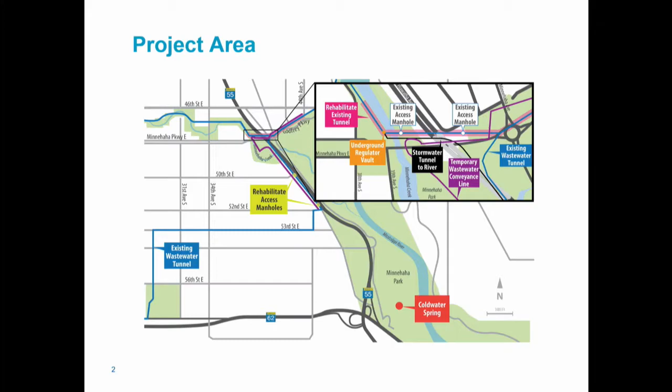Project scope includes tunnel rehabilitation. We're going to rehabilitate the existing tunnel, and to do that we need to provide a safe working place and ventilation of the working area, which might require the installation of 2 ventilation shafts.

We're going to rehabilitate and convert the regulator R4 structure to an emergency relief structure, and also rehabilitate 2 drop shafts, one at 50th and one at 52nd Street, due to hydrogen sulfide corrosion damage. Also included in the work is cleaning of about 2,000 feet of the 1MN340 interceptor.

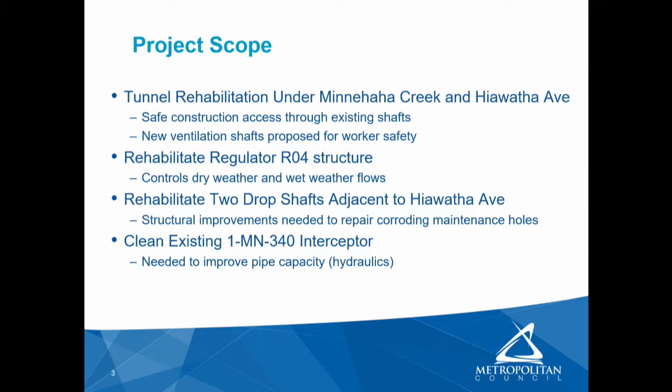This map shows the properties impacted by the proposed work. There are 9 parcels owned by the Minneapolis Park Board. We'll need temporary and permanent easements. The bulk of this is for temporary conveyance and for improvements to the regulator or emergency overflow structure.

We also require one easement from a private property, Cap's Bar. In the item we noted we had trouble reaching him, but I found out today that we have finally made contact and met, and it was productive.

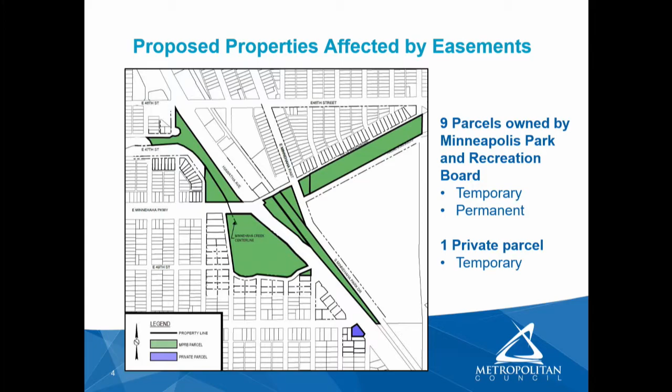This is the proposed construction schedule. Basically, the procurement phase will start in February, last to probably around July, and then construction thereafter, terminating in May of 2022.

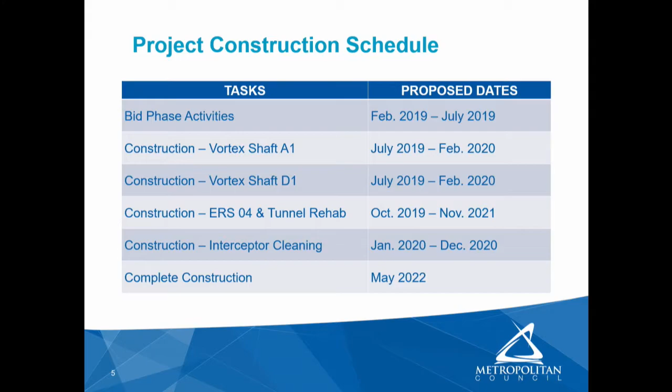Lastly, I'll restate the proposed action: that the council adopt Resolution 27, authorizing the acquisition and use of condemnation for permanent and temporary easement acquisition, all for the emergency relief structure R4 and the 1MN344 tunnel rehabilitation, project number 807629.

Are there any questions for Scott? You said the condemnation is of permanent and temporary easements—how much of it is temporary? Madam Chair, I don't have the precise figures, but most of it's temporary, for the temporary conveyance piping and pumps. Only one private property is involved. Madam Chair, that's correct.

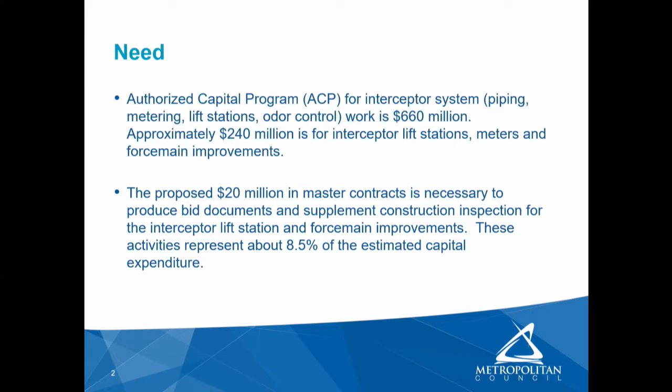Basically, the contract scope is full service engineering services. That means all disciplines are addressed, or the firms are capable of providing those services, and it will be utilized in preparation of bid documents for interceptor projects involving lift stations, meters, and force mains.

And a portion of the value of the contract has been set aside for construction services, and this involves shop drawing review. For any equipment that's going to be installed, you get shop drawings, it needs to be reviewed. Requests for information - often contractors have questions about the construction documents, and the designer has to address those. And construction inspection.

We received 10 proposals. The committee reviewed all 10. Each committee member reviewed it individually. Once they were reviewed, they caucused, met maybe 2 or 3 times, to determine the highest ranked proposals.

They recommended awards and contract values as shown here to Brown and Caldwell, Bolton and Menk, Stantec Consultants, TKDA, and SEH, each for $4 million. These firms were the highest ranked and provided the best directly related experience and expertise.

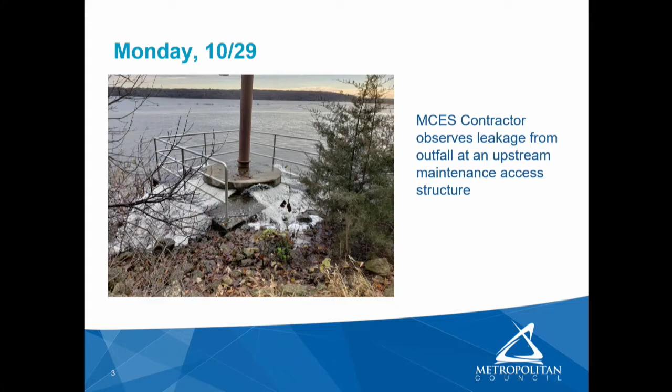On Monday, October 29th, our contractor, LS Marine, was out completing a river survey. They were preparing to start work to replace bedding under that section of the outfall where the rock training structure would be placed over it. So they were out doing survey work, and they observed leakage at an upstream maintenance access structure on the bank. And they contacted our construction field office and let them know.

This is a close-up of the kink in the pipe. Can you see that? 48 inches. Doesn't look like it, but it's right here. And also, this is a close-up of the end section that was torn. This is the end of that kinked segment. This is not where it broke off. This is the 130 feet that was missing. That's where it had torn and come loose.

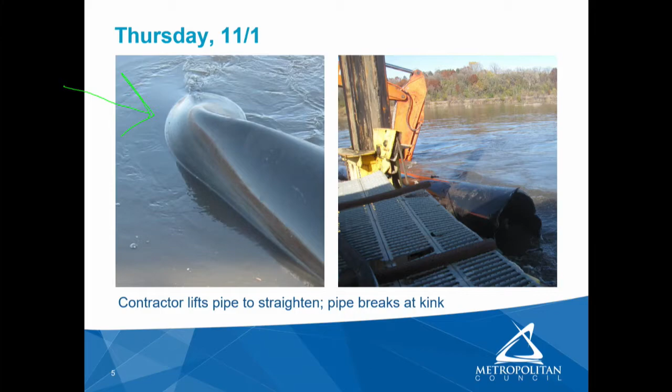Bummer. I did it. I left that. Sorry, Susan. I think I can still get it.

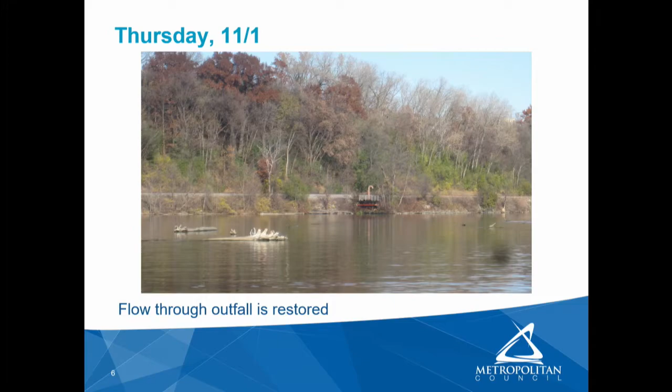Leakage from the upstream maintenance access structure stopped as soon as the kink had broken loose, and the flow through the outfall has been restored. Note that the plant treatment capacity and the plant performance were never compromised. We declared an emergency Thursday at the end of the day because the outfall is damaged. The end section is unrestrained. It had concrete anchors every 20 feet. Those at the end are missing. The discharge point is not in its permitted location. You know, this ensures adequate mixing so that we meet our effluent permit limits.

Immediate repair is necessary because the outfall pipe is vulnerable to further damage. It is in a high barge traffic corridor, and the area is currently under construction by the Corps of Engineers. As I mentioned, they want to get in and install that second rock training structure. Before we can repair anything, we need to confirm the condition of the remaining pipe. This week, we plan to have the inside inspected, and we also plan to do another river survey that would give us an idea of the location of the existing pipe, give us more information, and then we would be able to design a permanent fix.

The work supports the Thrive outcome because it's efficient, effective use of resources for preservation of infrastructure, the Thrive outcome of stewardship. The emergency declaration in the amount of $6 million is based on the estimated total replacement cost. As I mentioned, we don't know the condition of the pipe, and if we can reuse it, we will. But at this time, we don't know what's been torn loose. We would like to verify the condition of that pipe through the total length that's in the river.

I'd piggyback on that question. When I look at the red line where the actual channel is, it seems to come awfully close to your outfall. Was that thought about when they positioned the outfall? Madam Chair, I did review the facility plan for cost estimates and the value of that pipe, and there was some fancy hydraulic modeling of barge velocities and forces on the end of the pipe to make sure that it could withstand that, not a hit. If you notice, the new outfall, the brown line, is shorter than the abandoned pipe, so it was pulled out of the barge traffic somewhat.

I can also state that, on here it says that the Corps annually dredges this section of the bend for the barge traffic. And there's an area that's buoyed off. That's also a note on here. And we are outside of the buoyed path of the barges. So when they put this new rock wall or dam in, will that further protect the outfall?

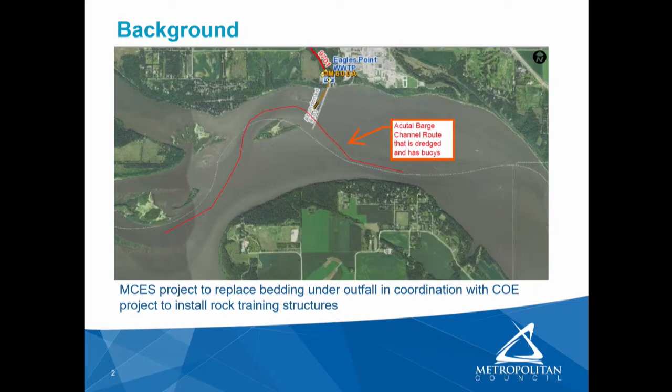Madam Chair, possibly. We have some engineers that think it could protect the outfall, but I think the outfall outlet needs to be on the other side of the rock training structure so that it can get the channel mixing of the velocities. And once it's outside of the rock training structure, it's unprotected. I showed on the slide that this would not necessarily protect the outlet against barges. Those are big boats.

But there's a design to the outlet. This outlet came out of the bank and turned up, designed to maximize mixing, and you'll see the concrete collars here that help with the restraint, and on the end is the armoring riprap to keep the river muck away and keep that thing from moving around. So there is a design, and I think the next one would probably be similar. We might beef up the end, but it needs to get out in the mixing flow.

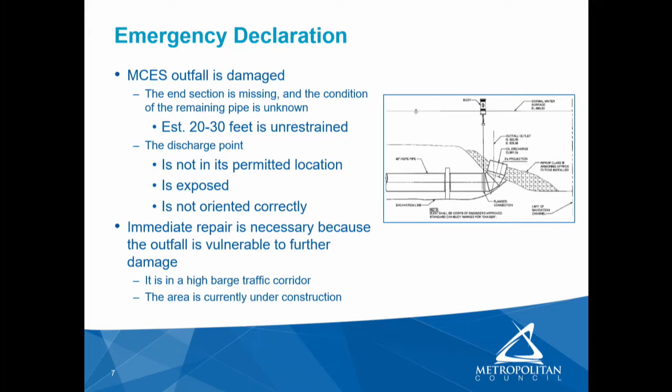Sounds good. So the proposed action is that we ratify the emergency declaration attached to the business item for repair of the outfall pipe from the Eagles Point wastewater treatment plant in the amount of $6 million. Do I have a motion? Or are there other comments?

I'll move the action. Sure. We have a motion and a second. All those in favor, please say aye. Aye. Opposed? The motion passes. Thanks, Renee. We put you through the ringer there.

The next item, 2018-312, is a request for a public hearing on the acquisition of the Rogers Wastewater Treatment Plant. And Janine's going to walk us through this. Madam Chair, members of the council, tonight we're asking you to authorize a public hearing for the Rogers Wastewater Treatment Plant acquisition. Some background:

So the Rogers wastewater treatment plant acquisition was identified in the Thrive 2040 Water Resources Policy Plan and was also identified in the City of Rogers comprehensive plan. So again, the background, the acquisition of the Rogers wastewater treatment plant was contemplated in their 2030 comprehensive plan, and this amendment was approved by the council in 2016.

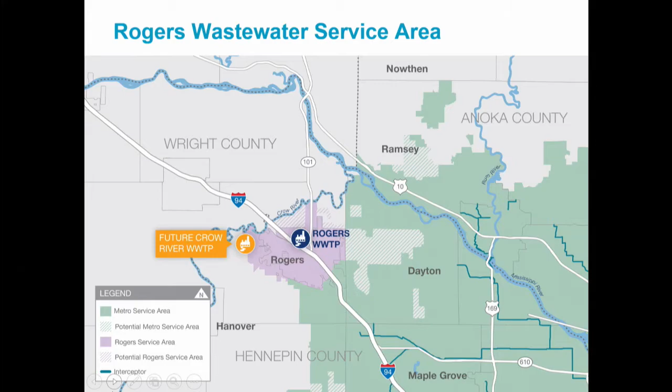So the Thrive outcomes is stewardship. The wastewater treatment in the region protects water resources and public health. Prosperity, the regional wastewater system exists and does foster the economic growth of the region. And then the principles of collaboration are clearly identified. Council staff has been working with the City of Rogers on this possible acquisition since 2004. It's been a long, long time.

The recession had a lot to do with kind of a slowdown of their desire to have us acquire their plant. But now with growth continuing and the Elm Creek Interceptor having limited capacity to serve the northwest Hennepin County area, it has now become apparent that it's important for us to proceed with the acquisition. Whoops, excuse me. So the key dates for the Rogers wastewater treatment plant acquisition include authorization of a public hearing. If approved tonight, it would go on to the full council the 28th of November.

We would hold the public hearing mid to late January of 2019. And after that public hearing and consideration of the comments, we would ask the council to consider authorization of an acquisition and wastewater service agreement with the City of Rogers. We anticipate that would be available February of 2019, followed up by the Metropolitan Council shortly thereafter.

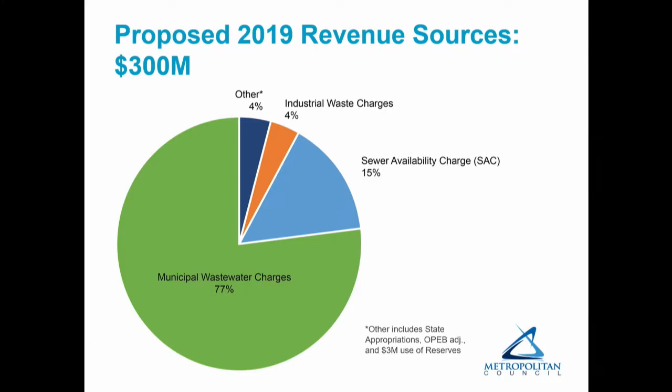Before Deborah gets to the review, and I think I'm going to skip over this slide, before Deborah gets to the review of the actual proposal, she will walk through the steps that MCES is taking to meet the goals for operating the regional wastewater system in a sustainable way. And then she will transition to a technical review of the STIR proposal. And then I will wrap up our presentation with some concluding remarks.

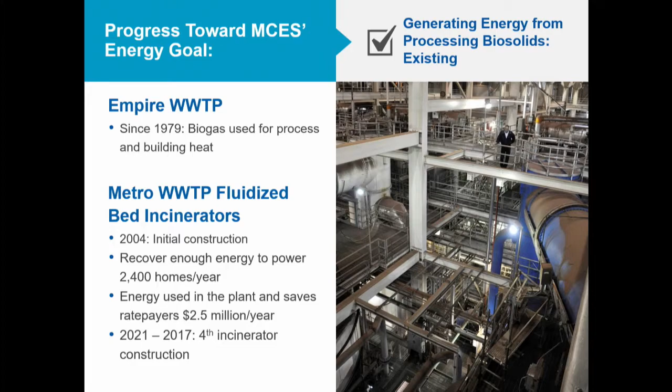In the future, we plan to install at the Empire plant a biogas combined heat and power project, and this will use biogas from solids processing to generate about 30% of Empire's heat and power needs, saving about $350,000 per year. We'll also upgrade the boilers there to high efficiency boilers.

Another area that Janine ran through in the beginning was recovering heat from plant effluent. Since 2004, at the Eagles Point wastewater treatment plant, we have been recovering heat from our effluent and using it to heat the administration building. It was kind of a pilot test at that time. We wanted to learn more about heat recovery, and what we found is that the equipment is actually relatively issue-free when used on plant effluent, so there's little solids to clog up the system. And in 2019, we'll be installing some monitoring equipment so we can better determine the energy savings.

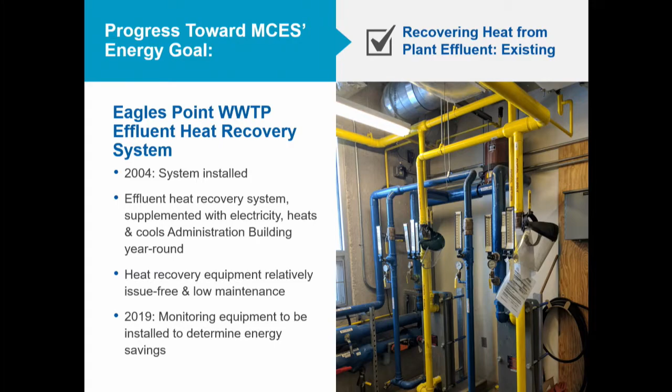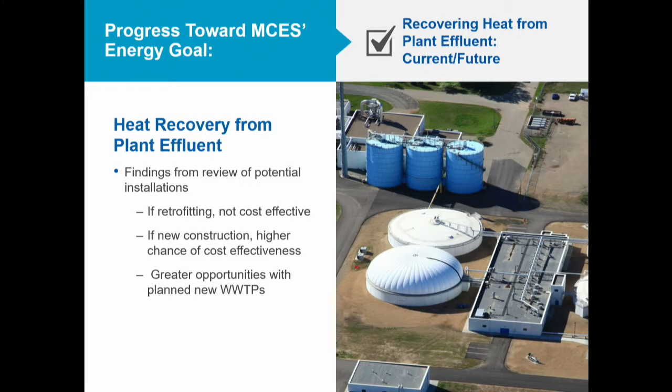We recover heat from plant effluent, as I mentioned, at Eagles Point. But most recently we've done a study of where else we might do that. And what that study found is that if we're retrofitting our heat equipment as part of what would need to be done, it's not really cost effective. But if it's new equipment, we have a higher chance of it being cost effective. And so we would be looking at those new treatment plants as opportunities to recover heat from the effluent.

Another area is solar power generation. We've been making a lot of progress here. In 2017, at Blue Lake, we completed a behind-the-meter solar installation as well as a council-sited community solar garden. And we completed council-sited community solar gardens at Empire and the Seneca Ash landfill as well. We should note that we have also been subscribing to community solar gardens that are not on our site. And we project that 80% of our projected energy savings from solar will come from subscriptions.

We've also been pursuing additional technologies as capabilities and economics are proven. In our aeration basin, as mentioned at the beginning, that's an area of high energy use. We've completed dissolved oxygen control projects, enhanced diffuser cleaning, high header pressure reduction. We basically are implementing what we identify as proven technology, cost effective to install, and moving along with that.

We've also, at Metro Plant, installed some high efficiency lighting improvements, and you can tell between the second and third slides there what a difference this makes in the tunnels at the Metro Plant once we've upgraded that lighting.

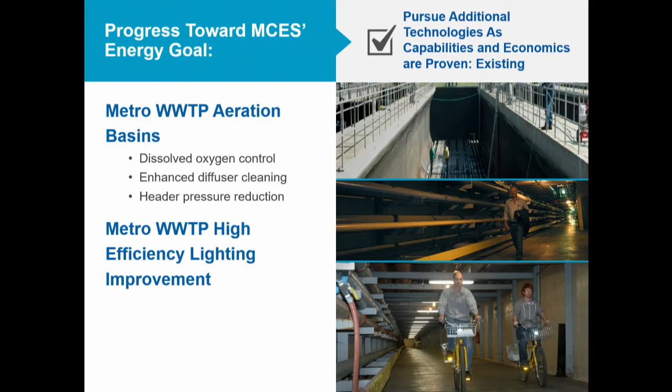We continue to look at ways to improve our energy reduction and meet our goals. And one of these, we believe, is the Industrial Pretreatment Incentive Program, which we think will actually change the characteristics of our treatment processes themselves. For example, at the Empire treatment plant, we recently completed an agreement with Kemp's to receive their high-strength waste from their dairy processing directly into our digesters.

And we will be able to produce more biogas that way, which we've been mentioning we use for process and building heating. And we believe we will increase that biogas production by 23%. That would enable us to decrease our energy use for heating by the equivalent of about 172 cars per year. So we'll also be able to take some traffic off the road. So that's not equipment per se, but a different way of running our system.

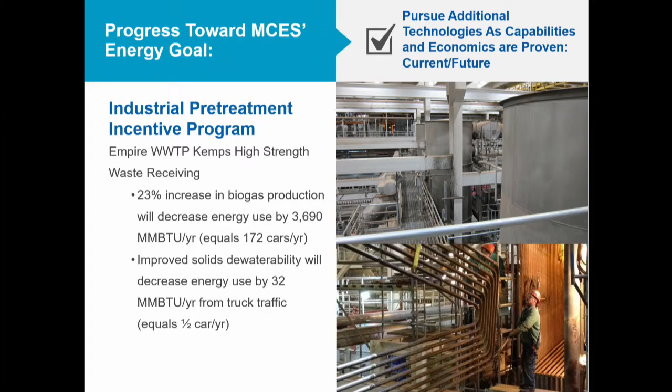But there's kind of the so what. We've done these projects. What has the impact been? We've been tracking our greenhouse gas emission reduction, and this graph shows from 2005 through 2017 how the progress has been going. A number of different colored bands there. The green is electricity, the light blue is metro sludge incineration, the orange is effluent discharge, the dark blue is natural gas, the light orange is Seneca sludge incineration, and the gray is nitrification, denitrification. So these are all areas that we track in terms of greenhouse gas emissions and reductions.

The other items shown on this graph are the 2030 state policy goal for energy reduction, which was about that 30% reduction, which we have already met. And then the 2050 reduction goal is shown in the darker band there. And we're well on our way to meeting that goal as well.

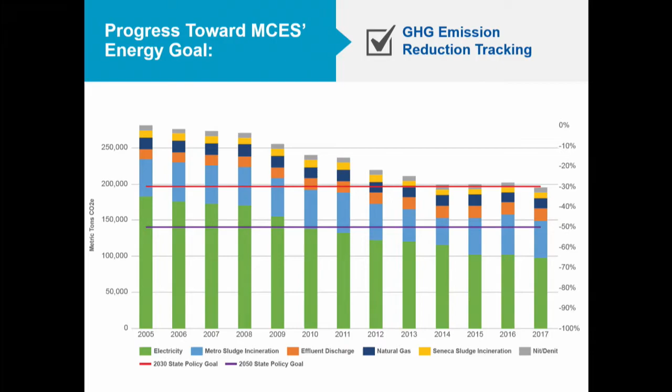I do want to mention that we look at ourselves in comparison with other sources of greenhouse gas emissions. And this graph represents some of that information. We are kind of in that orange band in the middle. These are areas that the state uses to track greenhouse gas emissions and sources. The green is the electrical production. The light blue is transportation. Like I said, the orange is waste, which includes wastewater treatment plants, but also landfills.

The dark blue is agriculture, then industrial in yellow and residential in gray, and then commercial at the top. So across the state, that's the bar on the left. The orange there in the middle is all the wastewater treatment plants and landfills. Kind of a small component there, and the region is shown on the right, and these are 2010 numbers. And so we're a small contributor there, but that doesn't exclude us from working on greenhouse gas emissions. It just puts it in context.

So, Deborah, I just want to make sure I understand. That's that narrow orange line in both graphs. That's the greenhouse gas from wastewater treatment plants and landfills? Right, landfills. So it's really quite small in comparison. Okay, interesting. I would have thought it would be worse. Mhm.

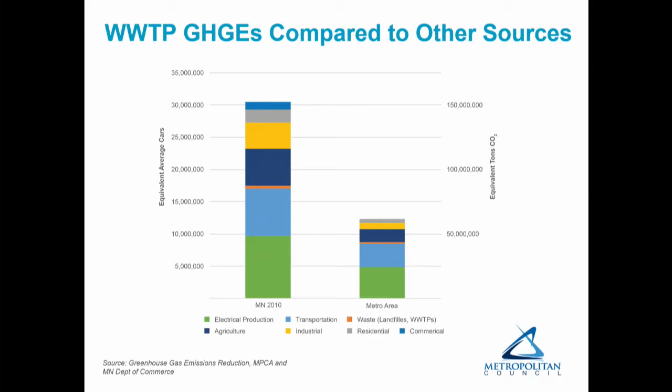So that is the portion of the presentation that talks about our progress towards our energy goals. I want to shift to the Towerside Sewage Thermal Energy Recovery proposed project.

We've got a little timeline here. About 3 years ago we received the inquiry from Ever-Green Energy about their potential STER application on an MCES interceptor. From 2015 to about 2017, we continued discussions with Ever-Green Energy about the feasibility of that application. In December of 2017, Janine and Larry Rogacki made a presentation to the Environment Committee about some of the findings from those conversations, and there was a decision to continue exploring the feasibility.

In June through August, we did a technical review of project information that Ever-Green Energy provided—what they call their project model—and had an opportunity to look at that and have conversations with them about it. In October, we met with Ever-Green Energy, presented our final comments about that technical review, and now we're reporting to the Environment Committee.

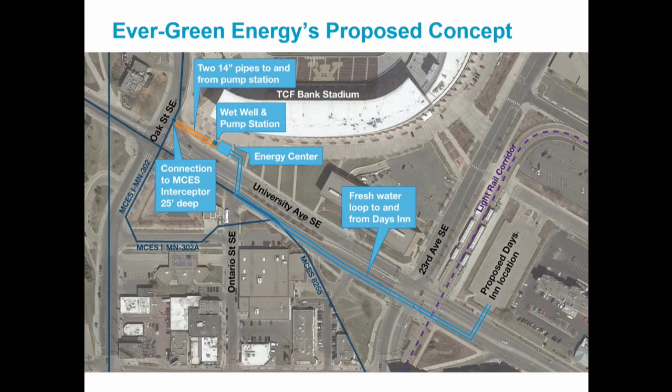This schematic just shows that loop. It's a little difficult to tell sometimes from the aerial what's going on, but the orange lines show the wastewater coming and going to that energy center through the lift station, and then that closed water loop coming and going from the site.

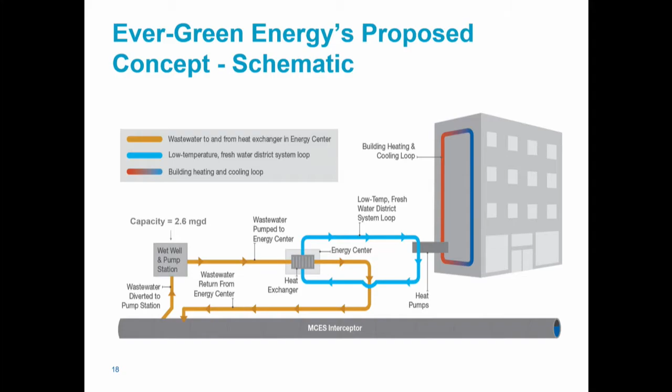There were a number of issues we looked at in our technical review. One was regulatory compliance. We met with the MPCA about how this sort of installation would be regulated. It's a new application for them, but they said a permit would be required, and that MCES must retain control and responsibility for the wastewater in the interceptor system at all times—that responsibility couldn't be transferred. We asked, can we do a handoff? The answer was no, it needs to be within our control the whole time. We concluded that MCES must retain ownership and operation of STER's wastewater-related facilities.

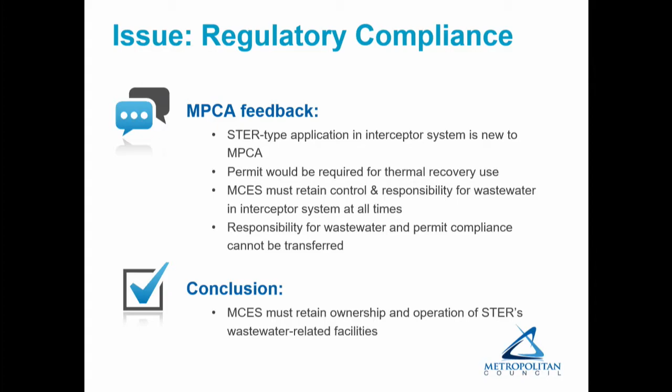Then we took a look at what a 2.6 million gallon a day lift station is like in our system, trying to find one that would be comparable. There is a lift station in Lakeville of similar capacity, 2.5 MGD. It also has a number of depth and piping similarities, so we felt this was at least a good comparison to start with.

This is a profile of the construction drawings, and the reason to show this is just the scale of the depth of the facility, which we estimate would need to be about 40 feet deep. That little blue figure on the left is there for scale, representing a person standing there in the wet well—I don't know why they would do that, but that's how deep it would be.

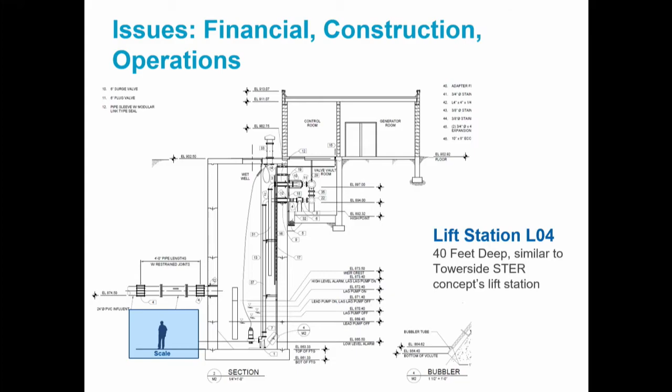We don't anticipate we would be able to do construction that way, that we would need sheeting and shoring and more expensive construction. You would need sheeting and shoring. Okay, got it, thank you.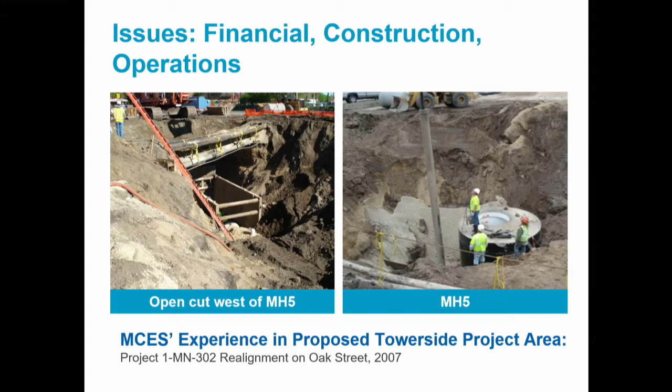So as we were considering all this, we looked at Ever-Green Energy's construction cost estimate, which was approximately $1 million, as we saw reviewed in their model and talked to them about it. Our construction estimate was about $7 to $13 million. So we really saw a difference there.

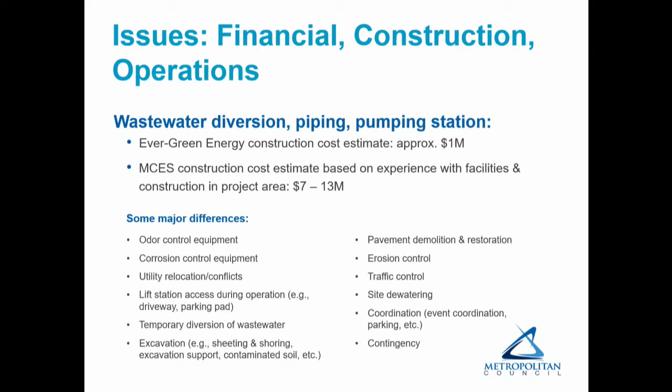Our assessment is some of the major differences between our estimate and theirs are some of the items listed here. Won't go through all of them. Things like utility conflicts, odor control equipment, temporary diversion of wastewater, site dewatering, traffic control. So we do think those are some sizable costs.

Another issue we took time to look into was performance information. We did find a lack of proven successful STER performance on untreated wastewater. We identified, and were referred by Ever-Green Energy to, two facilities where STER facilities were either installed or pilot tested. One of those is in Vancouver, British Columbia, in the southeast False Creek neighborhood, where a STER type installation is installed, again on untreated wastewater.

These are some of the items we think were associated with that installation. The drivers were really a commitment by the local city to reduce greenhouse gas emissions. What we found, this is information from a number of phone calls we made to the wastewater utility and the city, and also from reports they made available, is that their current rate for energy from the STER facility is about 23% higher compared with natural gas systems.

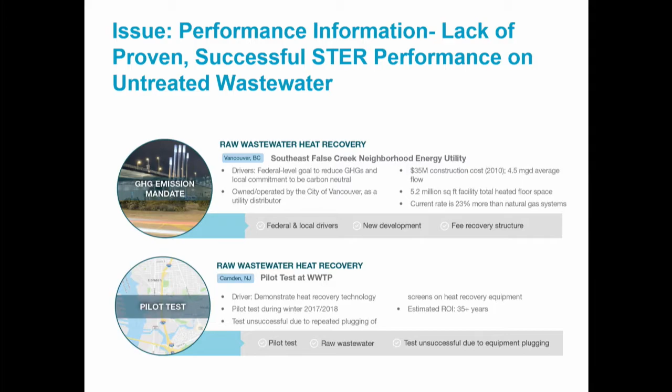We looked at if we scaled up, if we had these STER type facilities, more than one in our wastewater collection system, what impact would it potentially have. That isn't what Ever-Green Energy has proposed. They proposed one, but we need to look at, if we do this one, people are interested in doing more, what impact might that have.

So we looked at if our wastewater temperature to the Metro plant was reduced from 12 degrees centigrade to 11 degrees centigrade, a 1 degree change. Again, that's not what Ever-Green Energy's proposed project would result in, but we were looking at if this was scaled up, so we took a 1 degree change.

With our existing permit, a 1 degree change would mean that we would need to build 3 additional aeration tanks at a cost of about $50 million. That's due to our nutrient reduction process there, which would be impacted by the decrease in temperature.

We do anticipate further reductions in our nutrient reduction level in new permits. Under those anticipated permit conditions, we would anticipate needing 5 additional aeration tanks at a cost of about $100 million. Those are capital costs. There would be operational costs associated with it as well.

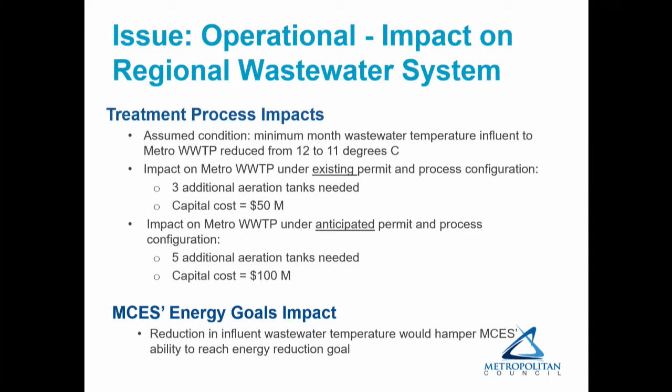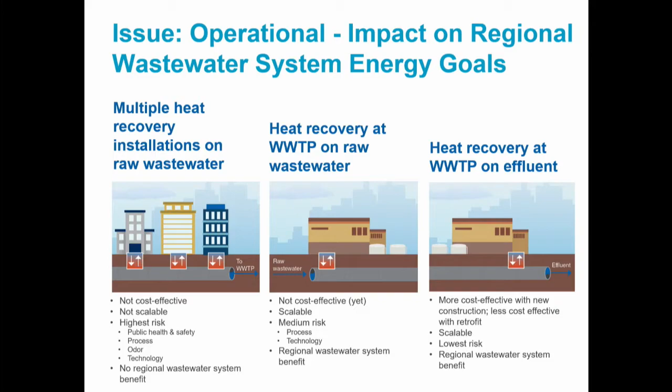We have reviewed this proposal with our Office of General Counsel, and they have indicated that unless it has express legislative authority, a government cannot compete with private business. The recommendation is the council not proceed with STER, or sewage thermal energy recovery, as that would benefit a private entity. Again, we have the authority to recover heat for our own purposes, but to benefit a private entity without express legislative authority, we would in effect be competing with private businesses that provide energy to private customers.

Secondly, the council has no policy about wastewater heat value transfer or sale. Again, I talked earlier in the presentation about our policies on a sustainable regional wastewater system, and it did identify energy recovery, but again, it was to benefit the regional wastewater system.